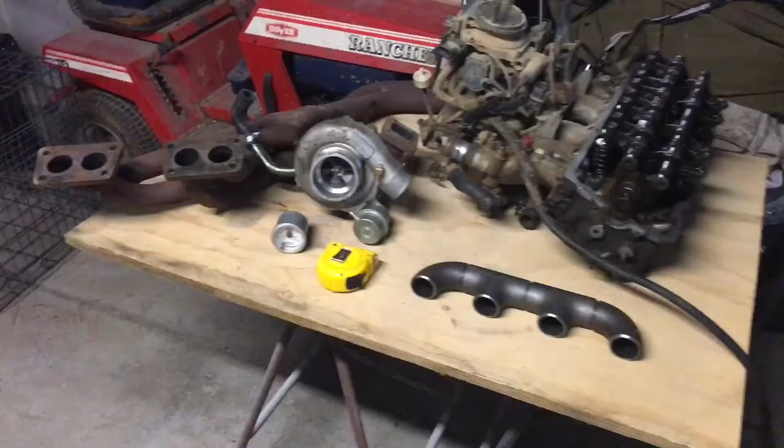Okay, so this is my collection of parts. I've got a head here, from a spare motor that I got. Got it apart. We've got the air intake with the throttle body on top, so it gives you a bit of an idea, but I'll show you it in the car later. I've also got a turbocharger with me, a boost controller, and this is the original extractors that were on the car. And then I've bought this steam pipe, which I'll be able to use to make my own turbo manifold. But more on that later.

Hey guys, so I brought you inside. I'm just sitting in front of my computer here, and I want to show you the Gasoline Vapor Systems Facebook page. This is the bloke Michael Vannozzi - apologies if that's not quite how you pronounce your name, Michael. The Facebook page has a whole group of people where he shares this information for free, encouraging others to do the same. And there's obviously a bunch of like-minded people on there.

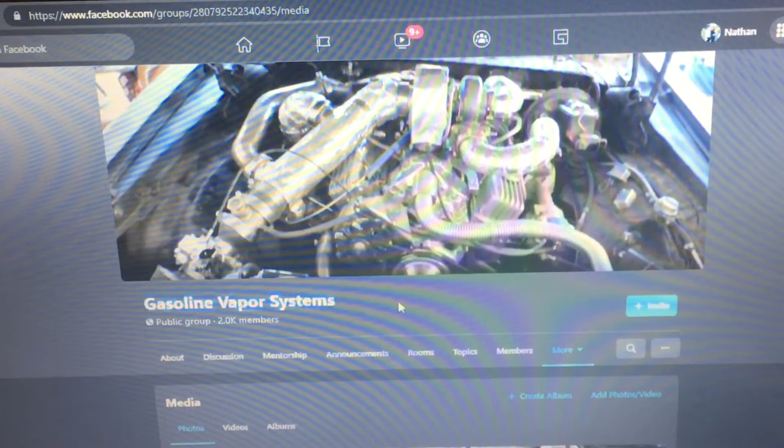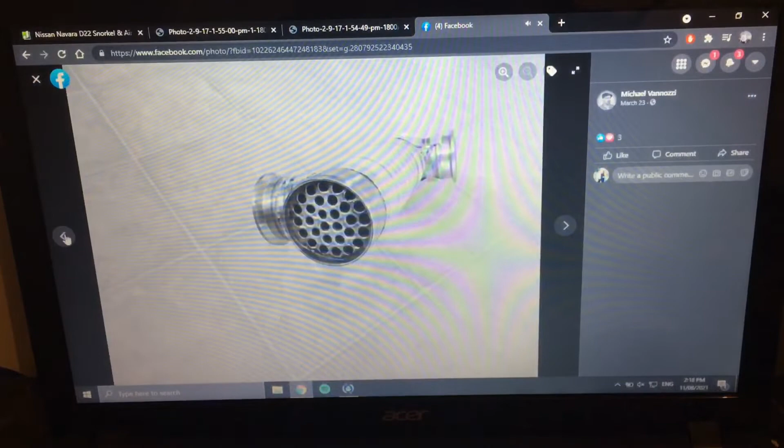So this is the Facebook page, as I mentioned, Gasoline Vapor Systems. If you just search for that on Facebook, you'll find this page. So I've gone down to photos because photos are going to describe things way better than talking will. This is Michael - he calls himself an inventor, and well, he is an inventor, and has done this sort of stuff, so you can check him out if you want. I know some of my audience is Australian, a lot of them are American, so this'll be right up your alley.

So this is the fuel heat exchanger - well, it's just a heat exchanger, really. This is the general concept you can see. Obviously you've got all of these small pipes - these little pipes, that's your actual air intake. That's where your air intake is, and they're tubes that run through the length of the heat exchanger. And then obviously your intake here, that's the hot exhaust gases coming through. They fill up everywhere in between - I don't know if you can see my mouse, but everywhere in between that goes through the heat exchanger and out. And then as the air is passing through here and the exhaust is passing through here, it's heating up the chamber, heating up the steel and all of that material. And as your air passes through, it obviously gets heated with it. So you would have a carby, and it would get hot when you mix those two together.

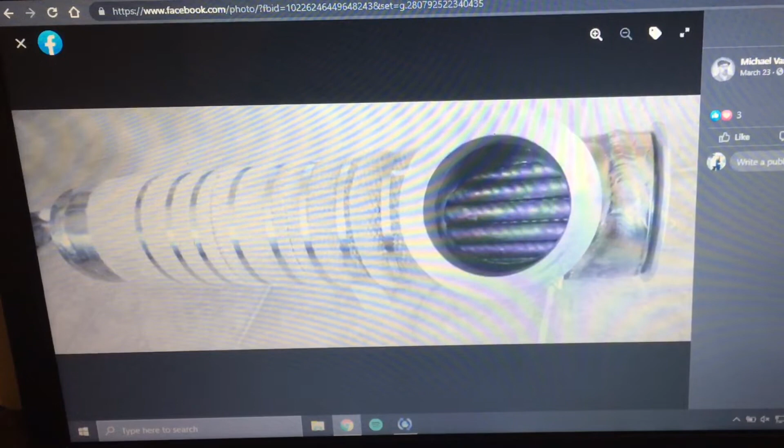And there you can see the pipes on the inside. So as I say, your cold air is coming through here, exhaust gases come through here and go out here. He's obviously heat wrapped it - you want to get it as hot as possible.

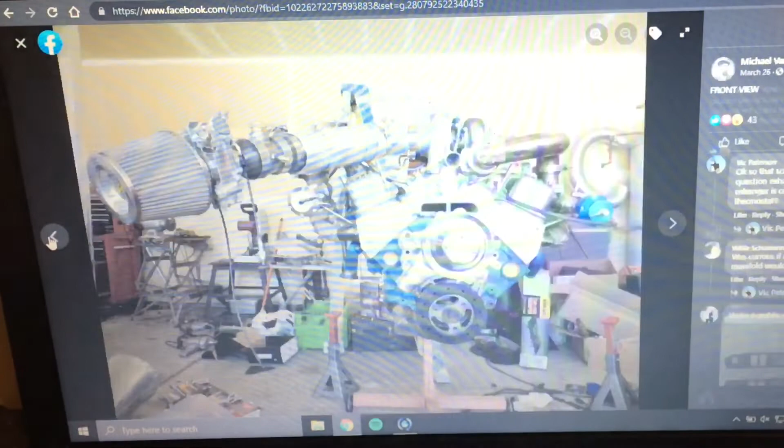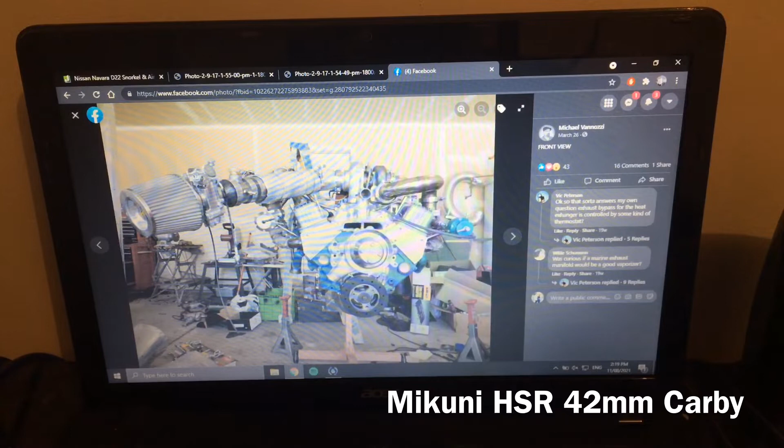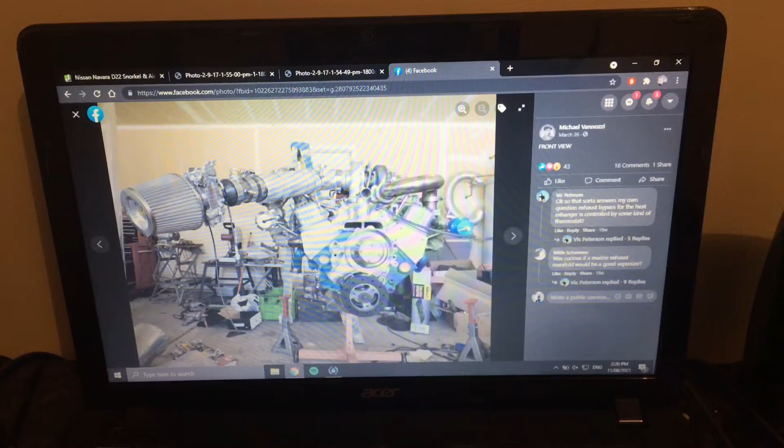I think this is a better photo - let's see if we can. Okay, so this one, yeah, this is a pretty good image. So he's got your air intake and a bike carb - something like a Mikuni or something like that, sounds kind of Japanese. Little bike carb from a race bike, and he's had to dial in the jets to get it all correct, so it's not just fit and done.

And then obviously the air passes through, goes into the heat exchanger, and that heats up the air-fuel mixture that's coming through, gets hot, and as I mentioned, the air and the fuel vaporizes, the air gets heated up, and it becomes one homogeneous gas that then feeds through your turbocharger impeller, and then directly into the head.

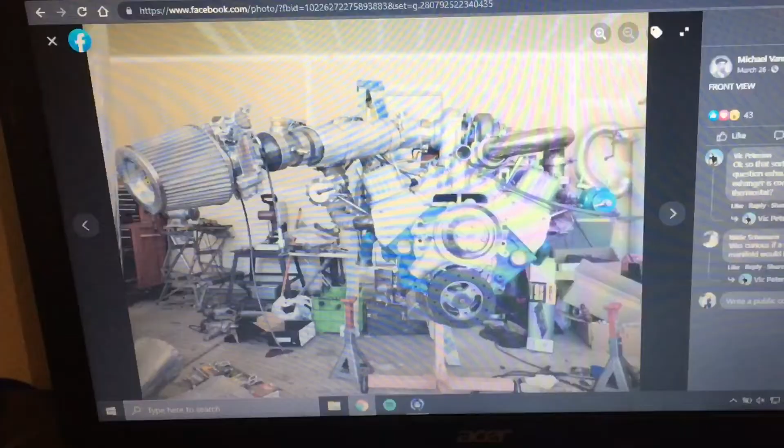Now, being a V8, this is a specific setup that suits him. What I'm going for is definitely not going to look like this, because obviously my air intake isn't in the center like this - I can't put my turbocharger on top like this. But if you do have a V8, this is a really great solution. So I'll go through a bit more photos, but generally this is what happens.

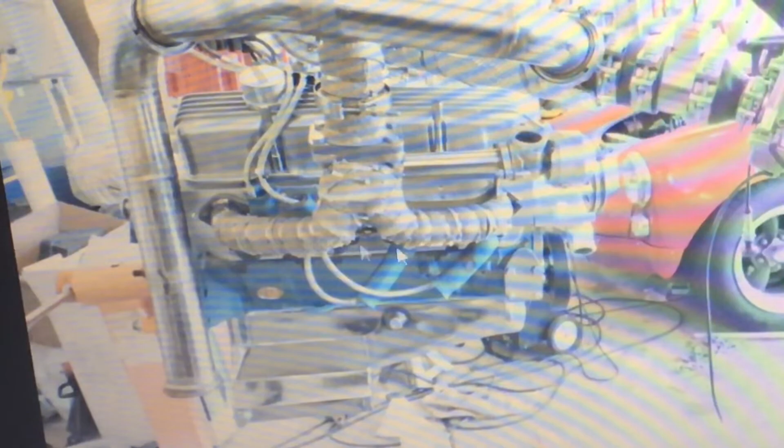Obviously, when you've got a V8 or a V6, you've got two banks, one on each side of the engine block. So if you've got a 6-cylinder or 8-cylinder, you're going to have 3 or 4 cylinders per side to do 2 different jobs. These exhaust gases come through and heat up the heat exchanger, doing what I just explained, and then obviously you can see the dump pipe.

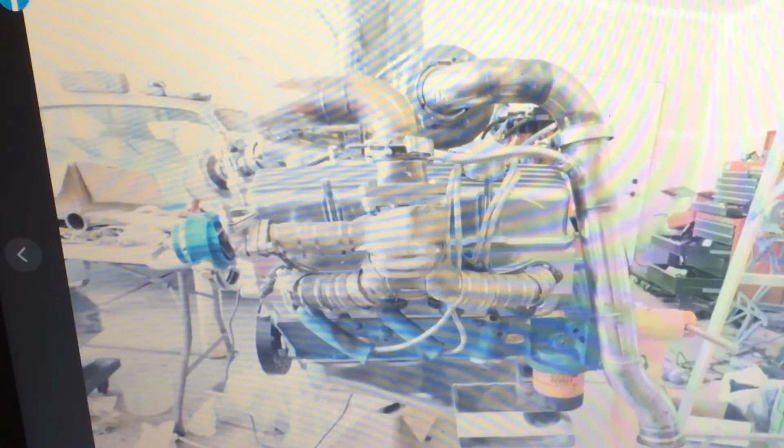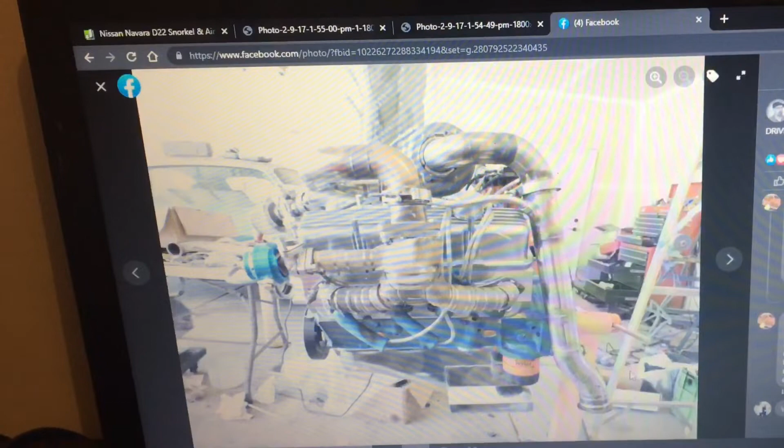Well, I don't know, is it called a dump pipe when it's not turbocharged on this section? Anyways, the exhaust. And then on the other side, if there's a photo, here it is. This bank is dedicated to spooling up the turbo. So this is the hot side of the turbocharger, where these feed in. You can see it's got an external wastegate here. It goes through this pipe, spins up your turbo, and now you have your dump up here. So it works out really well to have a V8 configured engine. And that's the general gist.

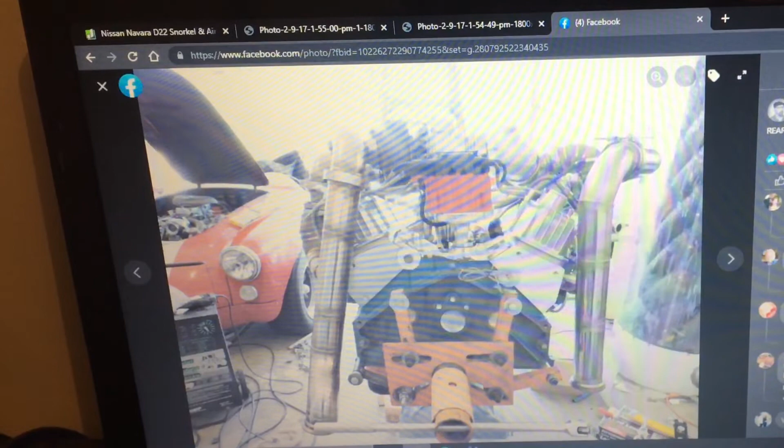So yeah, he's got an aftermarket distributor, and so this is the thing. He's gone old school. He's got a big Chevy V8, carbureted, with the distributor, all that. Whereas I'm wanting to build something that's modern and EFI. So I'm wanting to do a distributor delete on my motor, my KA24E motor, and get an aftermarket ECU to make the whole system run, and then I can do everything electronically, and that gives me the ability to tune it and modify things and do some really cool stuff.

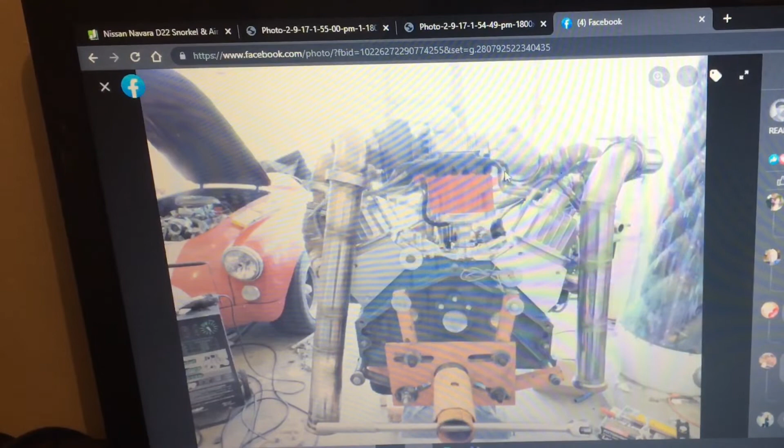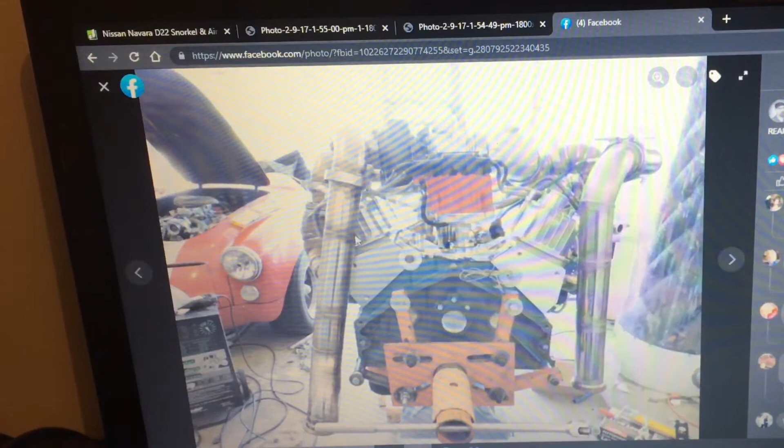Because again, Michael's killed it with this stuff, but as far as I'm aware of what he's posted publicly, I haven't seen virtually anything that's electronic or digital, or aftermarket ECUs, which means this is like a set and forget. Once you set your boost levels and your wastegate spring, that's it. It is what it is. And then you tune your carburetor to suit all of those different parameters. Whereas if I can tune mine, I can have different tunes, different ways that things work, and I can check all that information electronically and control it. So that's really cool. Let's keep going through here.

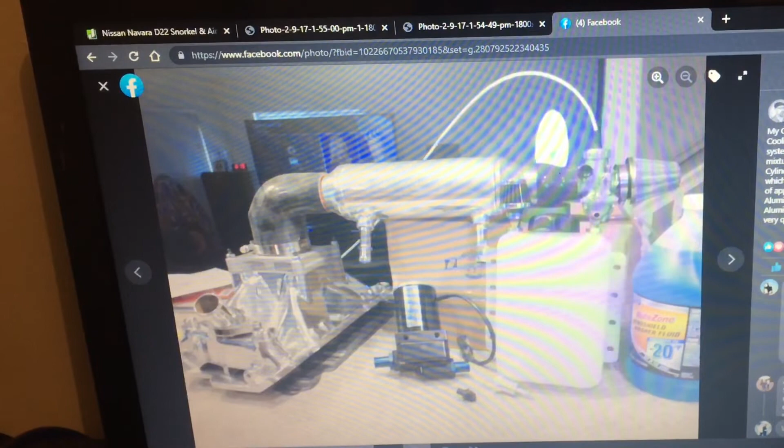It's a great resource, so check it out. It's another view of his system that's installed in the car. So this is, I can't remember what year, but it's an old Chevy Camaro, and he's had this thing running and driving in his car for about 5 years now.

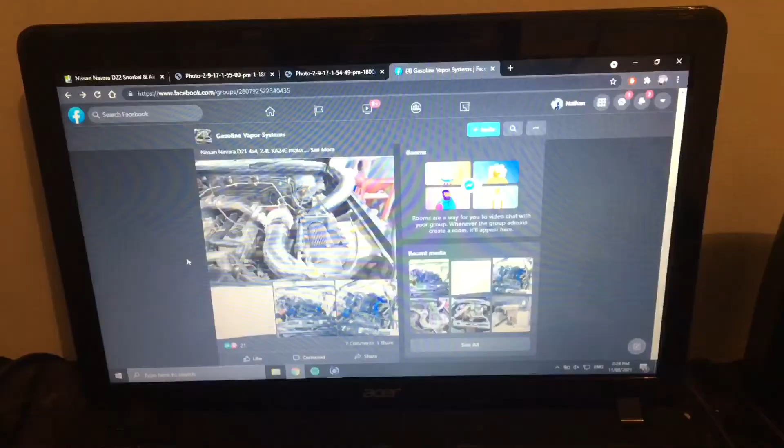Okay, so this was really cool. I actually shared this post on my personal Facebook page. Let me just read it. My 1978 Camaro with a 350 cubic inch Chevy V8 engine, it initially got 11 miles per gallon.

So let's just do some quick conversions here. No, that one, litres per 100. So that's how we calculate things in Australia. So he says originally he got 11 miles per gallon highway mileage established by road testing, so not what the book said or what the commercial said, but what he actually got before the modifications and before the addition of the Vapour system.

Let's just check out what that is. Okay, so before his modifications, the car was doing 21.38 litres per 100, so 21.4 litres per 100, which is pretty thirsty. But I suppose it's a V8, so what do you expect?

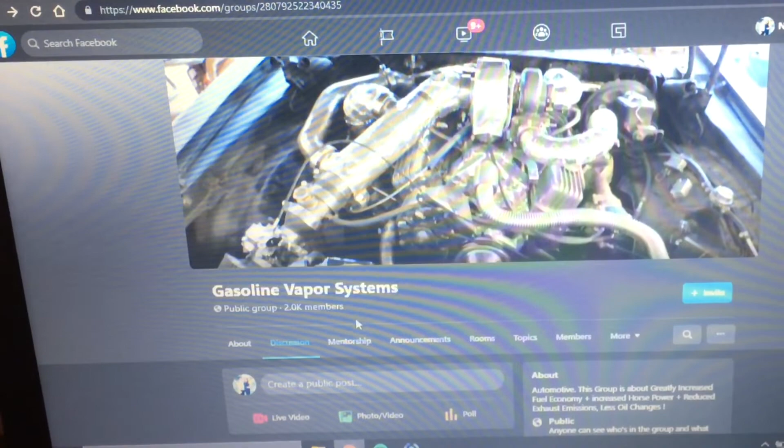But anyways, let's get back to my vapour system. I'm basing mine off his, but his, as you've seen, is carbureted and kind of set and forget. It doesn't have that real tuning potential.

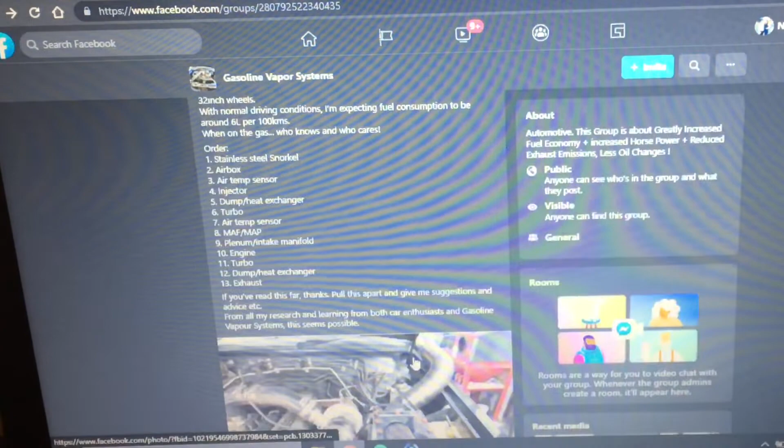I've actually made a post here explaining to the group that I'm planning on doing custom builds as part of this video. And so the idea is, as I mentioned, I can do it all electronically.

So here was an image I found on the internet. This gives you an idea of what I was actually going for, or at least with my design. So I've got a 4-wheel drive - a Nissan Navara D21, and it's got a 4-cylinder, KA24E is the motor, and I want it to be a 4-wheel drive and I want it to be powerful.

I use it as my daily rig, but I also want the possibility of having big power with reasonable fuel economy. So I'm trying to get the best of both worlds here and experimenting. So come along with me for the journey.

So you can see your snorkel comes through on the right side here, so this would be the passenger side in Australia. It comes through the air filter, so I want this to all be stainless. I want to have some type of perspex panel so I can see what's going on here. This has got massive - I think this is like a 4 or 5-inch tube.

I wouldn't need anything like that with a turbo. So essentially I'm going to be looking like this but lower. The idea is I'll have the stainless steel snorkel come through, but instead of swinging around directly into the turbo, I'll either have the snorkel come through the side here and then go in this way, and then I have the exit out here which will go down the side of the engine, and I'll have my heat exchanger.

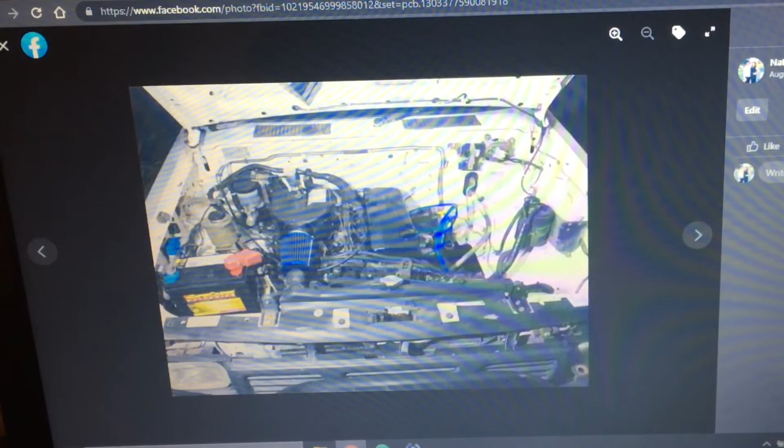Planning and collecting parts to build my petrol vapour system here in Australia on my four-wheel drive, designed mostly off Michael Vannozzi's system on his Camaro. The design will be somewhat like what you see in the image of the Nissan GQ Patrol - that's the image I had. Stainless steel piping with a snorkel and an airbox for off-road use.

It'll be EFI, not carby, with a single injector controlled by an ECU, probably a Haltech Elite. The turbo dump pipe will be a custom fabricated dump pipe slash heat exchanger.

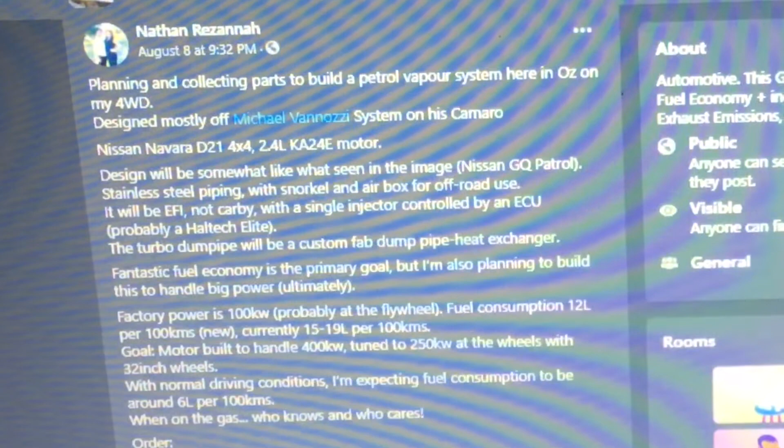Fantastic fuel economy is the primary goal, but I'm also planning to build this to handle big power ultimately. Factory power is 100 kilowatts, probably at the flywheel, which is nothing, and fuel consumption brand new is 12 litres per 100.

Currently for day-to-day driving it does anywhere between 15 to 19 litres per 100. The motor goals - I'll be rebuilding the motor at some point, not initially, but ultimately rebuilding it with forged internals.

Under normal driving conditions I'm expecting fuel consumption to be around 6 litres per 100. I got that number just based off Michael, seeing that he got 4 times the fuel economy he used to have. So I'm kind of going 6, 12, 18, 24, because I can...

24 litres, because I can easily get over that 20 litres per 100 if I'm just driving it hard, doing burnouts, driving up hills, and giving her a hard time having some fun. So I was thinking 6 litres per 100 would be pretty reasonable to ask, which sounds crazy because we're talking about 250 kilowatts and doing 6 litres per 100 - that's totally unheard of. Anyways, it's really cool.

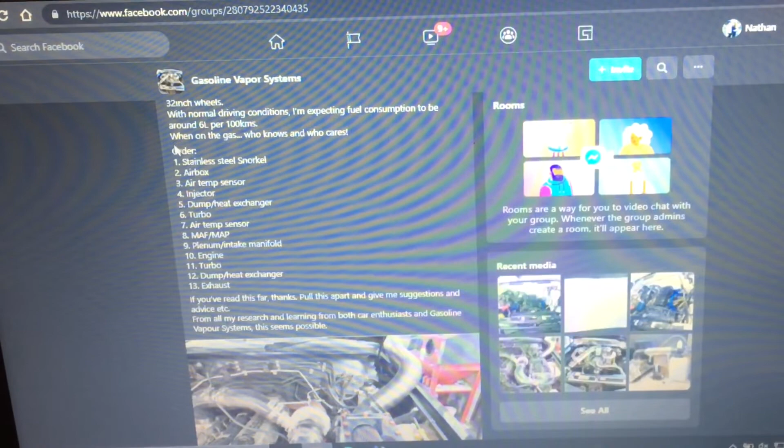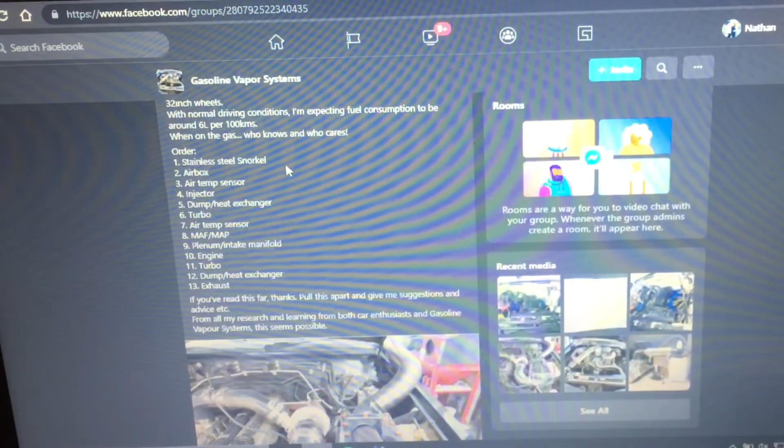So, stainless steel snorkel, obviously coming through - the whole system is probably going to be built out of stainless steel, but I'll just have to see. And then it comes into the airbox.

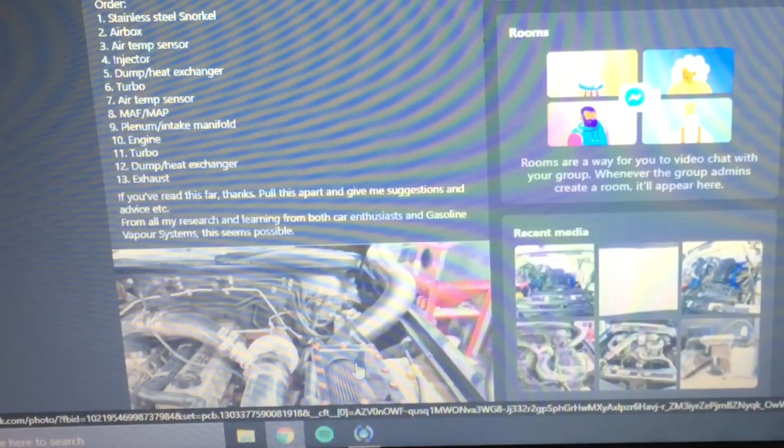After the airbox, directly coming out of that, you're going to have an air temp sensor. Directly after the air temp sensor I'm going to have an injector, and the injector is going to be put directly into the stainless steel, in a similar way that a water methanol injection kit would work, or how an O2 sensor would work.

You just have a custom made bung that would fit an injector, just one single injector. That would fit in, and then that injector would go to the ECU and be controlled and all that sort of stuff. So: an air temp sensor, an injector.

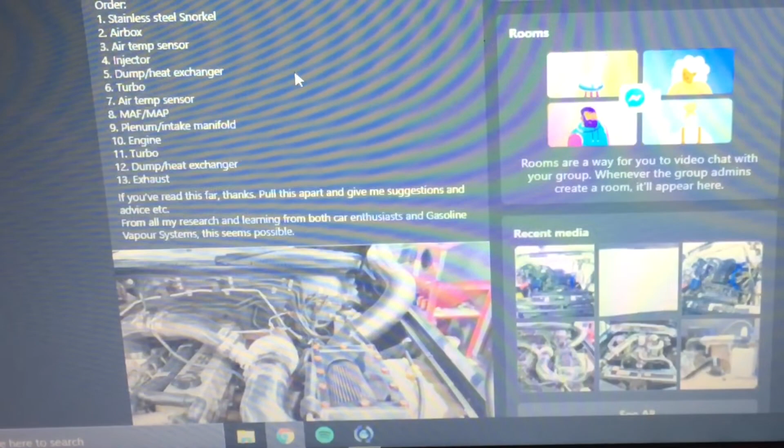The injector then goes down to the dump pipe slash heat exchanger. It does a U-turn, comes up the heat exchanger, gets hot, vaporizes the fuel, becomes one homogeneous gas, and then goes into the turbo at the front here. It'll curve around, go into the turbo, and as it's coming out, now boosted air, I'll have another air temp sensor. I'll just pause there and explain.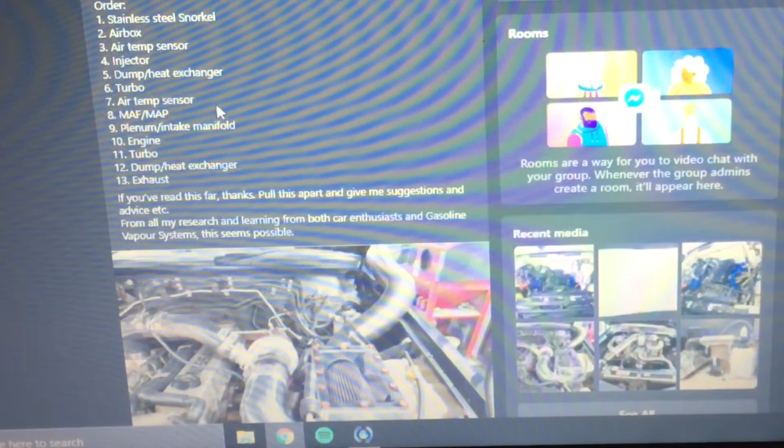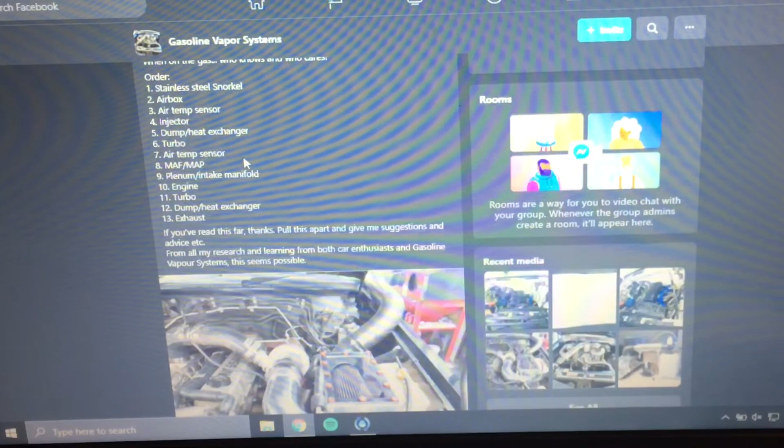The key thing with this is getting everything to the right temperature. With normal cars you don't necessarily need all that - you kind of just have an air temp sensor, which is good for the computer, the ECU, to figure things out, but even then it's not really the most critical thing. And then some cars, often people put them in four-wheel drives, is your EGTs - your exhaust temperatures - and finding out what that's at.

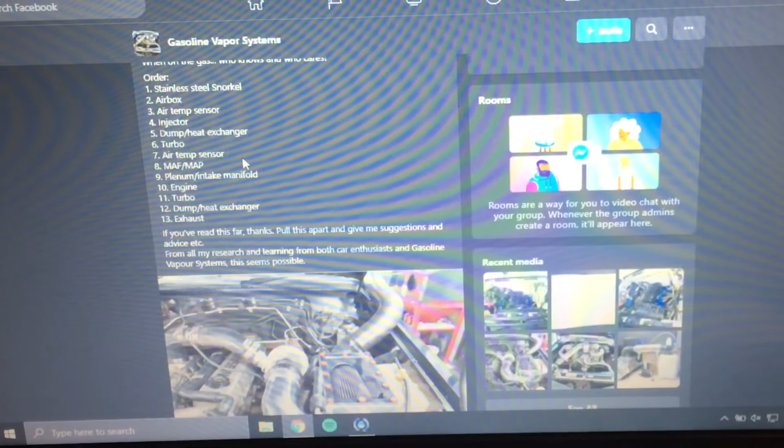All that's telling you is how hot it's getting, to give you an idea of how hard you're pushing the car and if you're going to overheat, that sort of stuff.

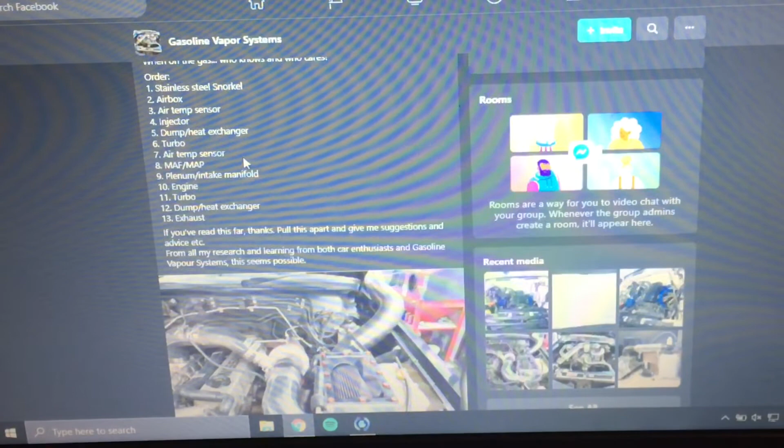The reason why I've got 2 air temp sensors is because I want to know the ambient air coming in, but then also once that fuel has been heated and the air's been heated and mixed, I want to know the temperature then, so I can look at before and after to see how efficient the heat exchanging is in the heat exchanger before going through the turbo.

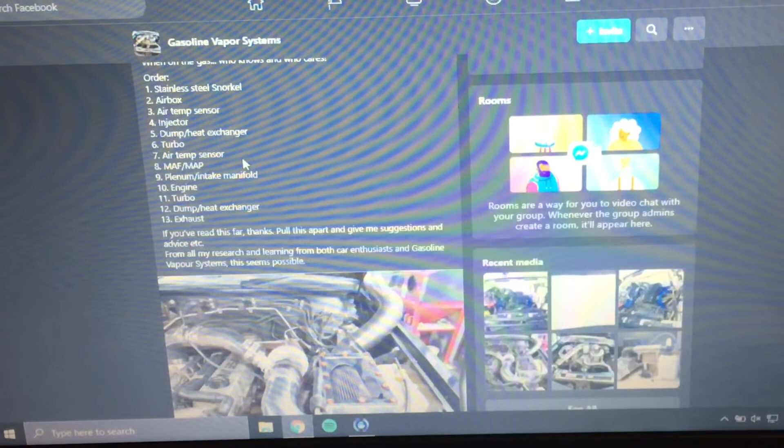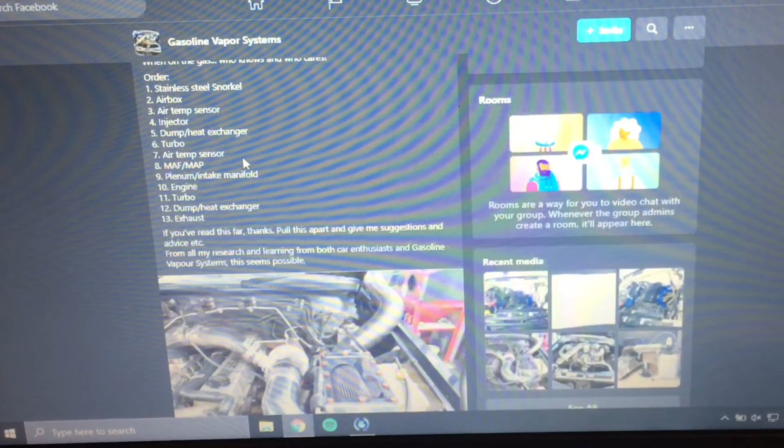The reason why that's important is because there's a very specific temperature that the fuel and air needs to be mixed at. I just want to take a minute to explain what I mean by ideal or specific temperatures required. I'm going to read something Michael posted, something he wrote on the Gasoline Vapour Systems Facebook page. I've changed a few things to make it relevant to Aussies, but essentially this is the magic sauce - this is what makes his gasoline vapor system, or the vapor system I'm going to build, different to any other wicking system, bubbler system, or any other cold vapor system. So I'll read from this and explain how it affects me and what changes I'll have to make, and work that out when we get there.

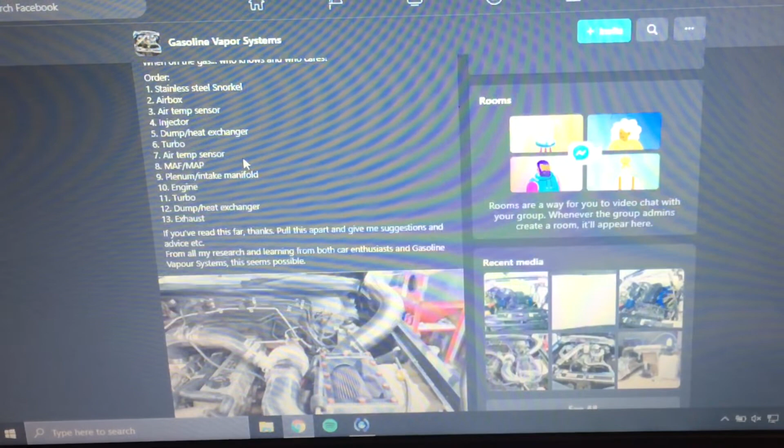The auto ignition point, or spontaneous combustion temperature, of petrol is 260 to 280 degrees Celsius. Typical exhaust gas temperatures, or EGTs, can be between 200 to 400 degrees Celsius for a small to mid-sized engine at lower load, or 4 to 800 degrees or even higher for bigger engines - V8s, high performance motors, high load, turbocharged, supercharged, anything working hard - which is obviously what I plan to be in, being turbocharged.

The exhaust gas temperatures entering the heat exchanger are moderated by the liquid petrol and air mixture also flowing through the heat exchanger in the opposite direction to exhaust gas flow. The air and petrol mixture becomes cold due to an evaporative cooling effect, caused by the first stage of vaporization of the liquid atomized petrol particles into the ambient airflow. The first stage air and fuel mixture gets down to approximately 7 degrees Celsius, which is just after the carburetor but before the heat exchanger.

When the cold air and petrol mixture flows through the tubes of the heat exchanger at high velocity, it counteracts the heat of the hot exhaust gases flowing through in the opposite direction. The air and petrol vapor mixture becomes a single homogeneous mixture and reaches a temperature of 130 to 160 degrees Celsius flowing through the 30 tubes of the heat exchanger. This temperature is not even close to the auto ignition point of petrol - approximately 100 degrees lower - so spontaneous combustion cannot occur. The exhaust gas temperature is then reduced in the exhaust pipe after exiting the heat exchanger to approximately 80 degrees Celsius.

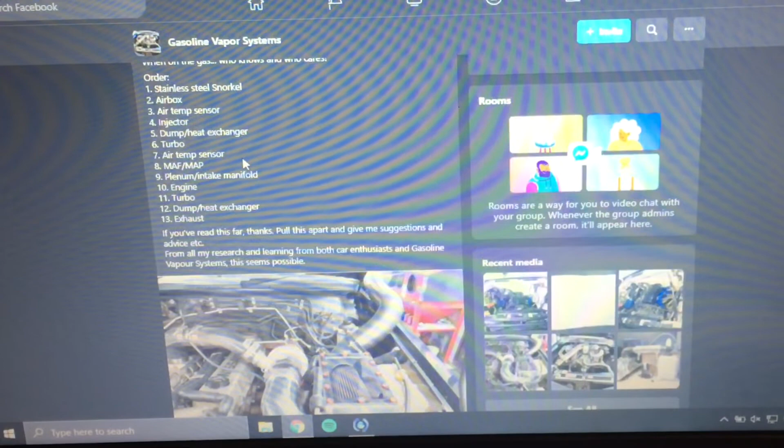Essentially what all of that means - I know it's a lot to take in - is we're trying to get a single homogeneous mixture and get that air-fuel mixture to a temperature between 130 and 160 degrees. So when I say I need 2 air temp sensors through my system, that's what we're looking for, that's what we're testing for and trying to achieve, and that's why we'll have 2 of them. And of course, we'll have to make changes to achieve that marker of approximately 150 degrees.

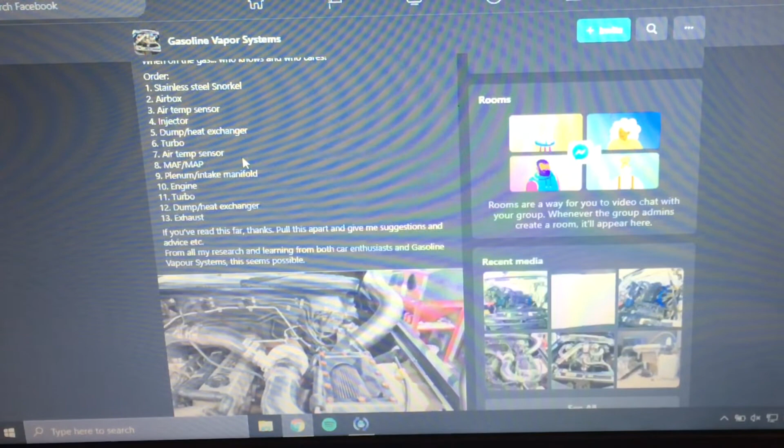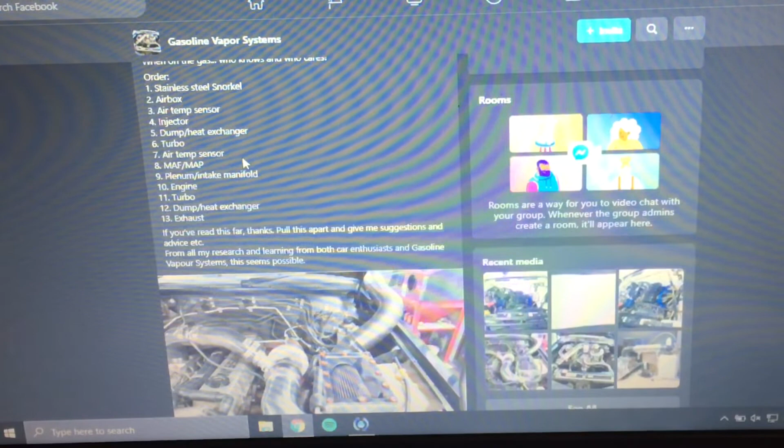Now, if you could imagine, Michael's got a V8 - it's a bigger engine, probably putting out more heat - and he's got a bank of 4 cylinders to heat the exchanger and a bank of 4 cylinders to spool the turbo. Whereas I've got 4 cylinders in total, which instead of having dedicated purposes will be dual purpose - both spooling the turbo first as it comes out of the engine, and then through the heat exchanger dump pipe. So I'm imagining, because of those factors, my EGTs will be lower than his, and I might not be able to get my mixture to that 150 degrees we need. So we'll have to work that out.

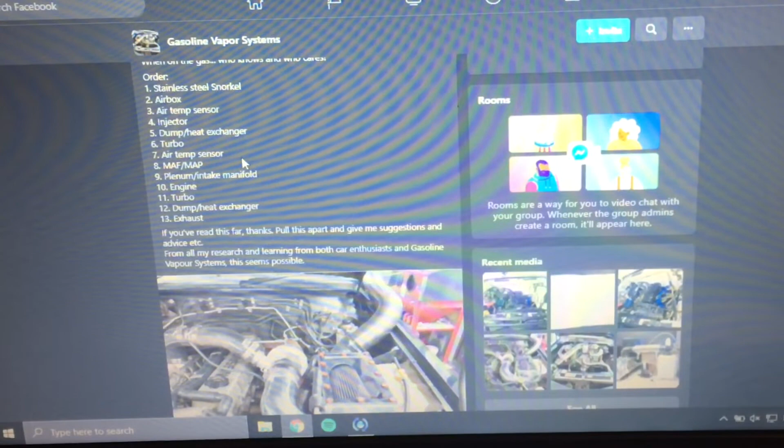I'm imagining I'll need a bigger heat exchanger than what he uses. Of course we'll use plenty of heat wrap to contain that heat, but essentially we'll work that out. I just wanted to point out those few things because that's a very specific and important part.

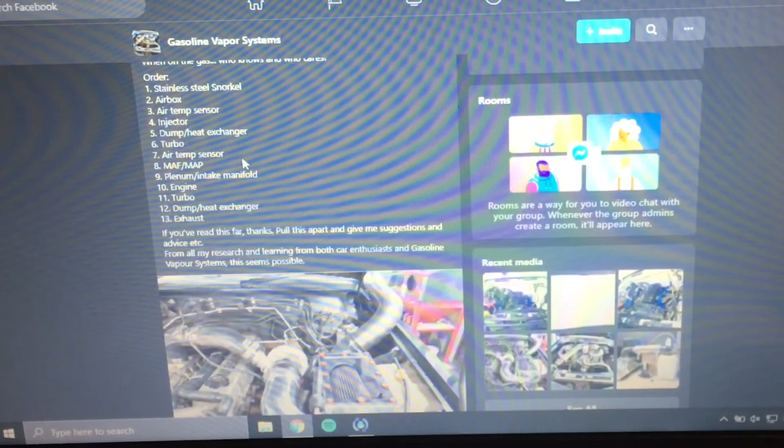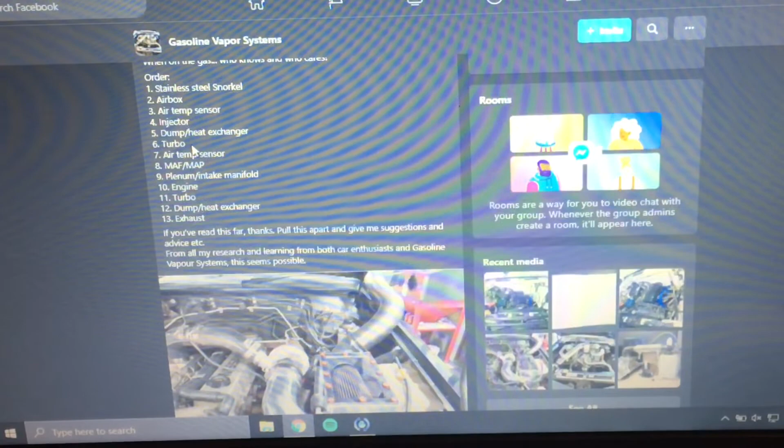But aside from that, let's continue on with how I'm planning to make my build. That information can then go into the ECU and we can do tuning and whatnot according to that, and find out efficiencies.

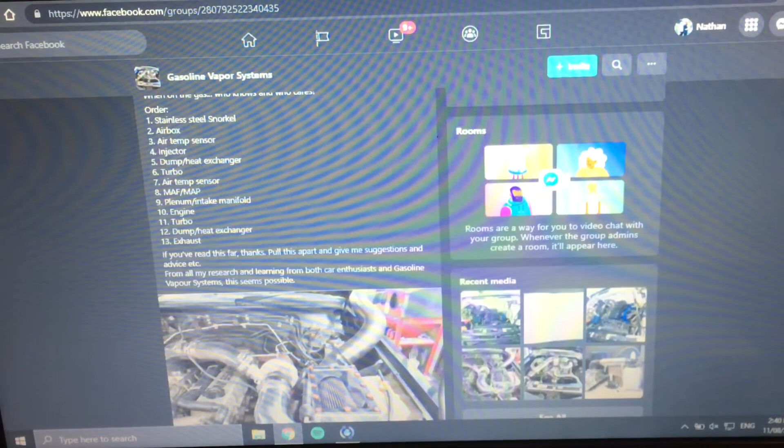Then the air would go across the front of the engine, through a MAF or a MAP - a mass airflow sensor or a manifold absolute pressure sensor. Then it will go through that into the plenum or intake. I'm hoping to get a decent plenum, especially for the bigger power situation. Obviously, it then goes through the engine, is combusted, and then back into the turbo, where it spins the turbo, goes through the dump, and then into the exhaust.

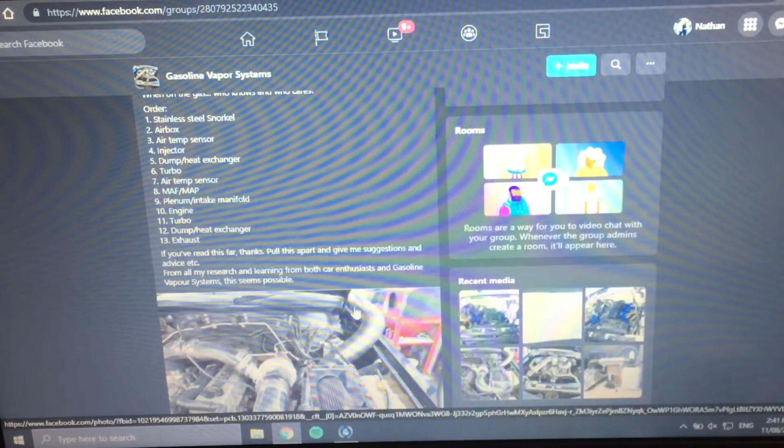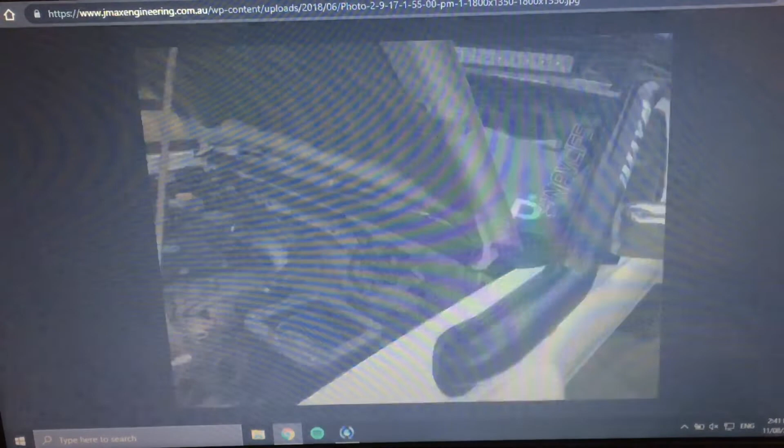So that's the general flow of how things will work. At this point it's all theory, but I'm currently collecting parts and bits and pieces to make it all work. Just to show you another image of what I'm expecting things to hopefully look like.

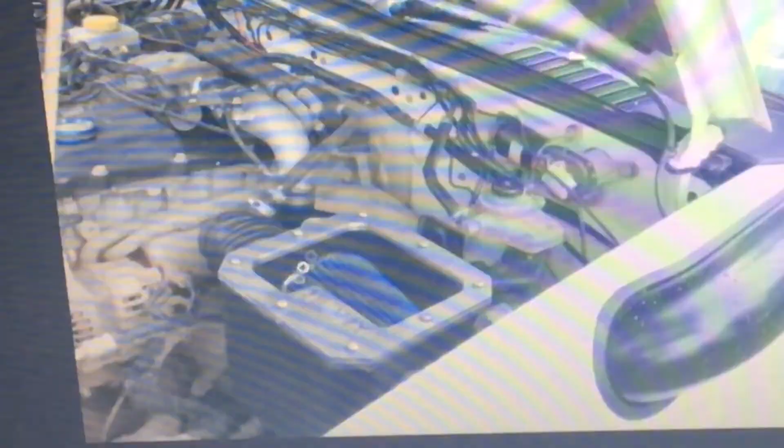Again, you've got a snorkel here. This is actually a Navara, but it's a D22 - essentially the same car, just with some stuff that looks a bit different in terms of cosmetics, appearance, and the engine. This is a diesel, but the idea is we'll have a snorkel come through on the passenger side into an air box with a clear top, and then the air will come down and drop down toward where the front diff tail shaft is, and do its thing.

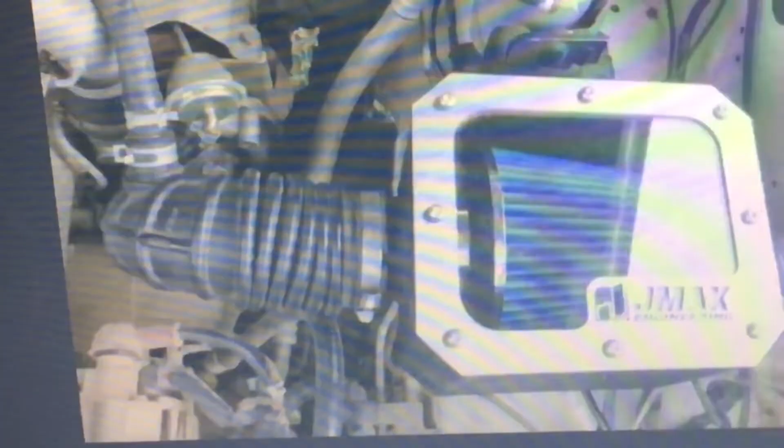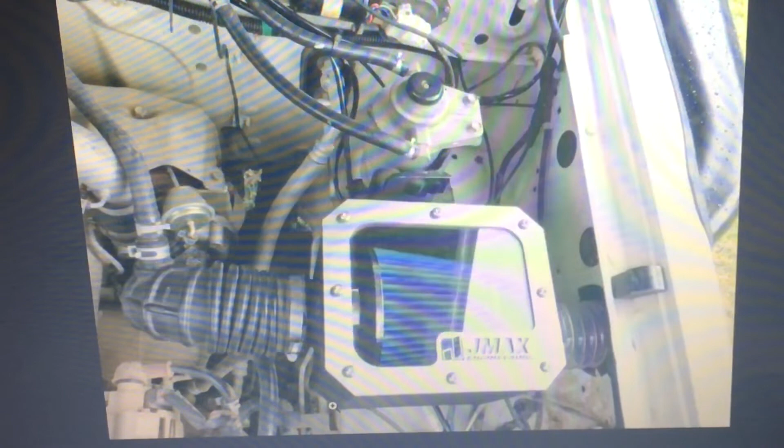So that's what it's going to look like. This is JMax Engineering - a company that does some really cool stuff here in Melbourne, and these are becoming quite popular. You see on any modified four-wheel drive, if someone's got the cash, they'll get one of these mint looking systems. They're all stainless steel or powder coated, and they just look great. So I just got these images from there to give you an idea. Here you can see it drops down into the turbo, whereas mine will come down into this section, do a U-turn, then come back up to the turbo.

But anyways, let's go see how this is going to work in the car. Head back outside to the garage.

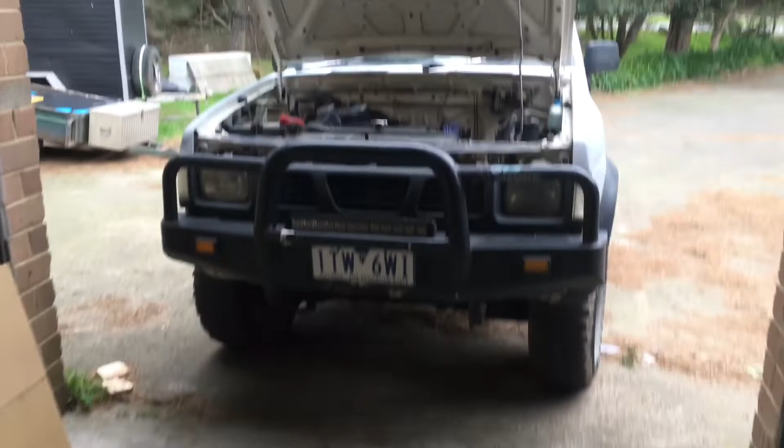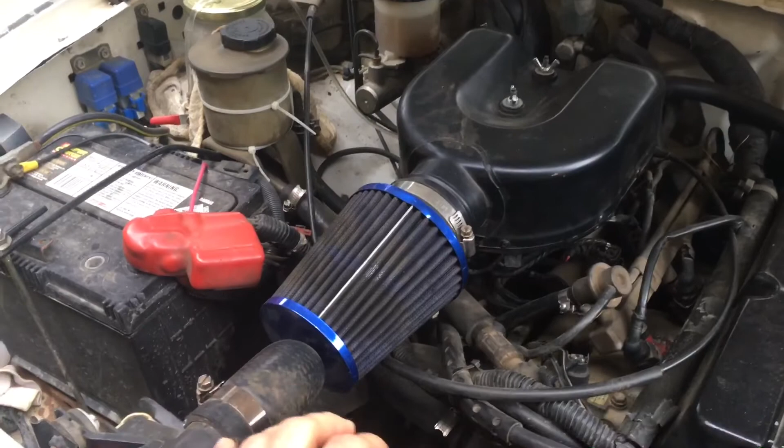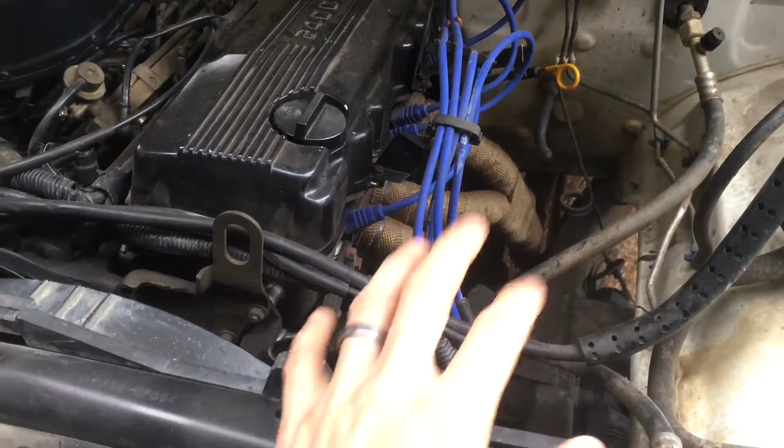All right, so this is the rig - this is the current setup. I've just got a kind of ram hot air intake, probably not too hot hopefully, with air coming through. But this is the system, and as you can see here, there's plenty of space for activities - lots of room to do a turbo conversion. It's really awesome because on this side there's stuff going on, it's not crazy but it's full enough. But this side, you just got all of this space to do a turbo conversion. Unlike you blokes in America, where you've got your brake master cylinder just there on the firewall - it's a lot harder for you because things are a lot tighter. So we're blessed in that way.

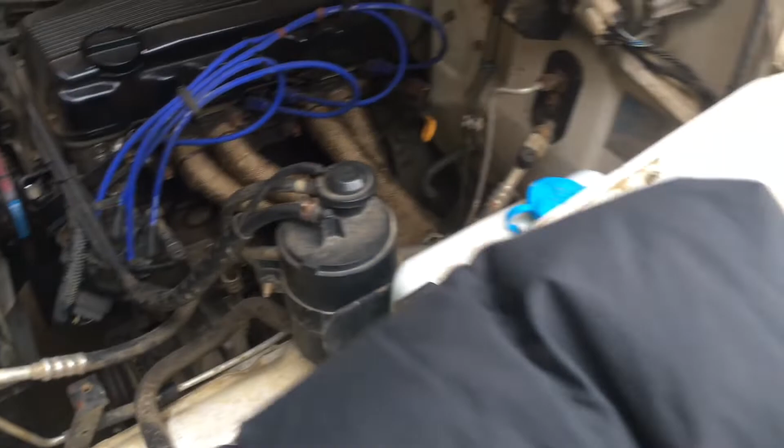As you can see, I've just got extractors on there that have been wrapped. So the idea is I'll be custom building a manifold - I've got some of the stuff there, I'll show you in a sec. Custom building a manifold and getting my turbo in place, and then like you saw on the internet, a snorkel come through. So I'll be doing a cleanup, an emissions delete.

Oh, me freaking dog has got out. Ollie, come here. How did this dog get out? How did you get out? And you're muddy. You're muddy. Why are you muddy? How did you get out? Tell me. Come here. Stay. Stay. Wait. Good dog.

Okay, so I'll be doing an emissions delete, just getting rid of all that junk and cleaning this engine bay up more, and anything that's not needed won't be there. And eventually when I do the new ECU with all of that, I might contemplate doing a new wiring harness if it's not too hard. It kind of seems like it is, but then I watched the bloke who made it seem like it's not. So we'll see how that goes.

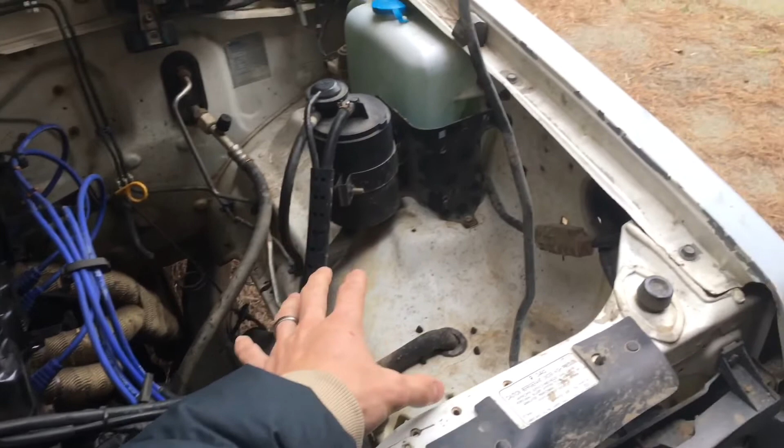But anyways, I want to clean up all this, and then I'd love to have a secondary battery here, and in this center section have the air box. So the snorkel would hopefully come through here into the air box, battery roughly here, and then have that dumping down there, coming back up, doing its cool thing, and then boosted air coming through here and passing through this section into a new plenum I want to get.

But look, I'm talking a lot about the stuff that's happening ultimately and in the future. In terms of how things are gonna be right now, it's gonna be quite simple - just get this thing turbocharged. Just leave it normal, like no vapor stuff.

Just get it turbocharged and have a bit of fun with it, because here's the thing - not made of money. It's always cool when you watch YouTube builds where blokes splash $5, 10, 20 grand on a build and it looks awesome and gets views, but realistically most of us can't do that.

If you're looking to do a fuel vapor system, maybe you're doing it for the heck of it because it's fun and unique, and that's cool. But realistically most people want to do this because they can save a lot of money each year on fuel - instead of spending 5 or 10 grand on fuel, you could cut that down by a quarter if it works out the way Michael's has.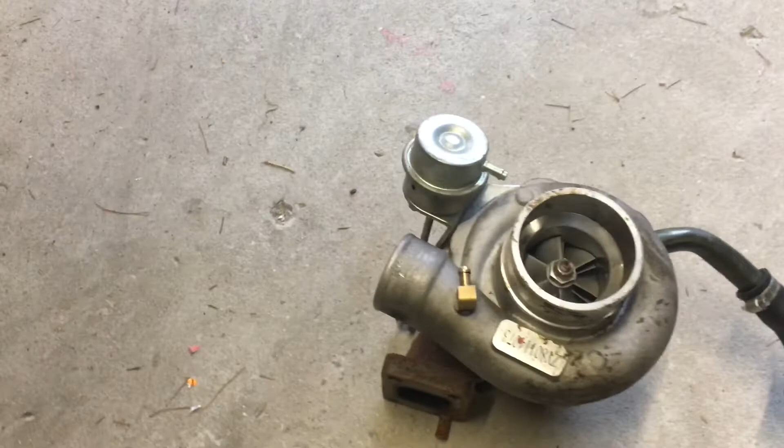This is the turbo I got. To be honest, I don't know much about it - it was given to me by my uncle, so thank you, Sanch. This is just a Chinese eBay turbo. You can check out the number there, but it's roughly equivalent to a T25, somewhere around there. So it's a decent size. Realistically it could actually be slightly big for my engine in terms of pretty factory kind of spec, but we'll see how it goes.

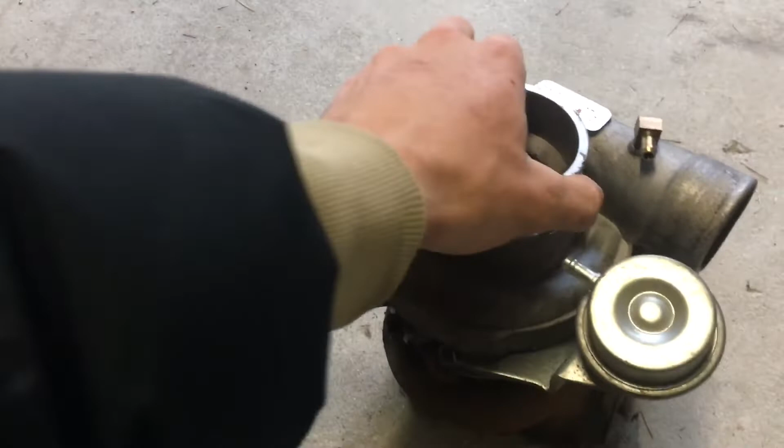I've watched other videos where they said a T2 is just too small, a T3 is okay, but a T3/T4 is just too big, at least for daily driving. If you want a torque monster and put down huge power, then big is good. But for now this will do the job, and essentially it'll work - it'll be a bit of a mock-up, test and experiment, and then ultimately I'll probably change out and get something a bit bigger, a bit newer, and get some of that fandangle hybrid technology going on.

Alright, so I've just pulled the head from the other car. I've actually got a second Navara - you can probably just see it out the back there. So I've got two of them, exactly the same motor, same everything. The idea is the other motor's apart pretty much completely.

As you can see here, I've got the head, the air intake, and the throttle body. It's mostly apart, and the idea was that I would rebuild this motor - have this one with forged internals, strong headwork, all that stuff. Once that's built, I would slap it inside there, and then take that motor, which is just stock but still healthy and good, just old, and put that into the other one. Then I'd have two working vehicles.

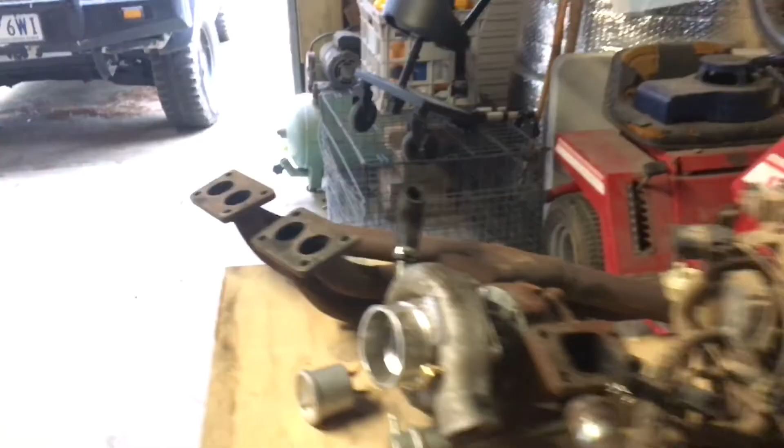But anyway, this is the head, and what I wanted to show you is essentially the turbo package. I'll be building my own manifold out of steam pipe, so I just bought this on eBay. If you go to a metal supply or fab shop, you'll be able to find this stuff. This is the long radius - you can get short radius and long radius, and I think the long radius just flows a lot nicer - and a T-piece.

This you can get in heaps of sizes - I think they've got roughly like maybe 10 or so profiles.

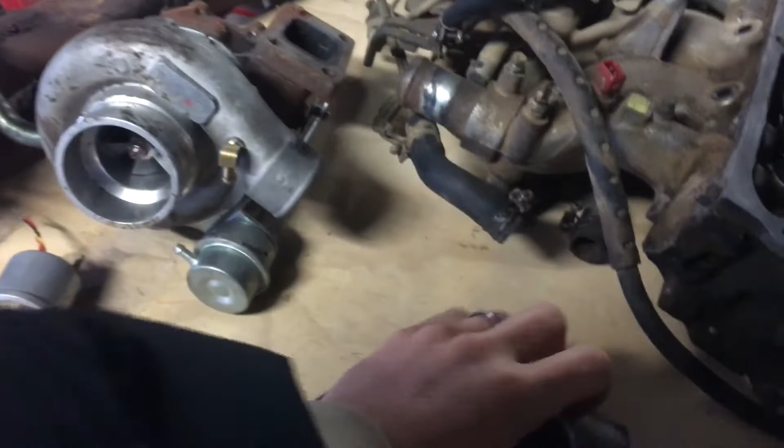I got this because it's just going to suit my car. It'll be welded together like that with trimming and whatnot. And then obviously I've got to make a piece for my turbo flange, and we'll slap that baby on there and she'll be golden.

So anyway, this is pretty much the stuff I got - just a basic boost gauge, and yeah, that's the package.

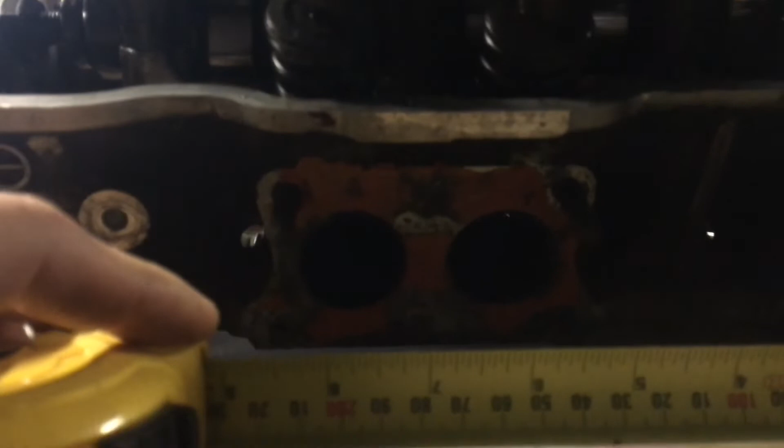So the way that I calculated what size pipe I needed - obviously you'll do this depending on whatever your car is. You can either find on the internet what size your ports are. I had a head, so I could do it, or maybe you can go to a wrecking yard and find your motor.

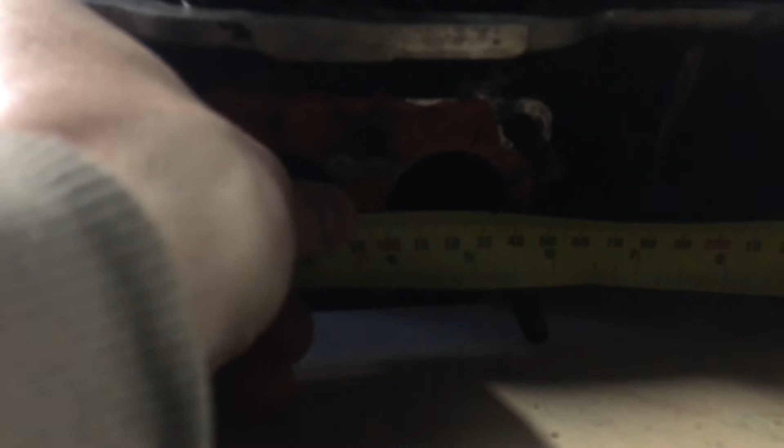But essentially I just got my tape and I just measured. I went right there and then I measured, and it was like 39 millimeters from memory. And then I also went to my extractors and measured those - maybe I had 40 mil, and then these ones were like 38 or 39 millimeters.

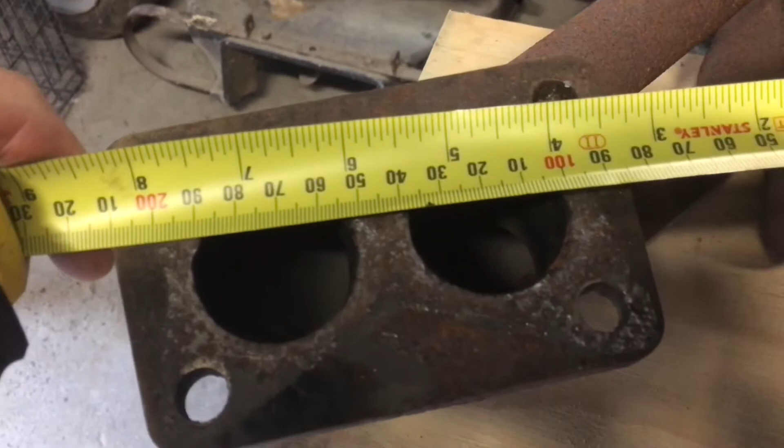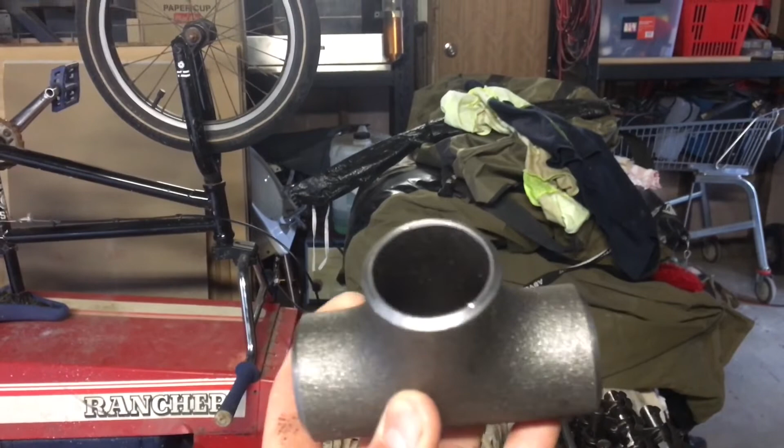And then I just went online - actually I got these from eBay, these were eBay special. I just found something, and I'm pretty sure these were 40 mil internal, so it was pretty much perfect.

So anyways, if you're wanting to do a turbo conversion, you'll be able to watch these videos and follow along. So like I say, initially this will just be a turbo conversion, very basic.

So there'll be no intercooler, because like I say, I'll be doing the iterations to make this into a fuel vapor system. I'd be adding an intercooler and all that piping later, but then I don't want to be cooling down the air - I'm heating it up. So I'm not going to bother putting that in.

Can you hear the rain?

Yeah, so it's not going to be intercooled. It's just going to have the turbo and be direct, super simple. Yeah, that's pretty much it.

I hope that's clear, I know it's long, I know I talk like crazy. But some people just want to watch YouTube and be entertained - I do that sometimes, but sometimes I want to learn stuff too. There's plenty of guys that know so much, they've had lots of experience, but when they make YouTube videos it kind of lacks detail. I suppose it depends on your intentions, but I'm always trying to find out all the details, all the specifics, because they can make it sound simple, but in their head when they're building, fabricating, calculating, there's a lot more stuff that goes into it. So I'm trying to save you guys the hard yards and document this whole process.